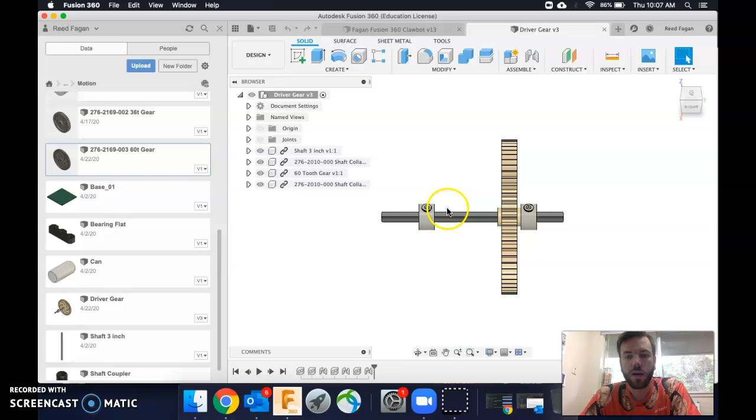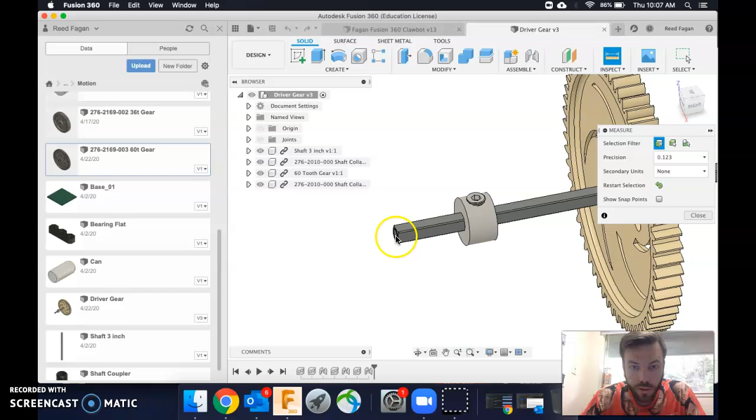I already measured this out so that when I put it in the assembly, it matches up and meshes with the other gear instead of being offset to one side or the other, right? So let me just tell you what those measurements are, and then you'll be able to do this yourself. From here, let's go from that circle to here. I think it's going to be 0.875. And that's exactly right, 0.875, okay?

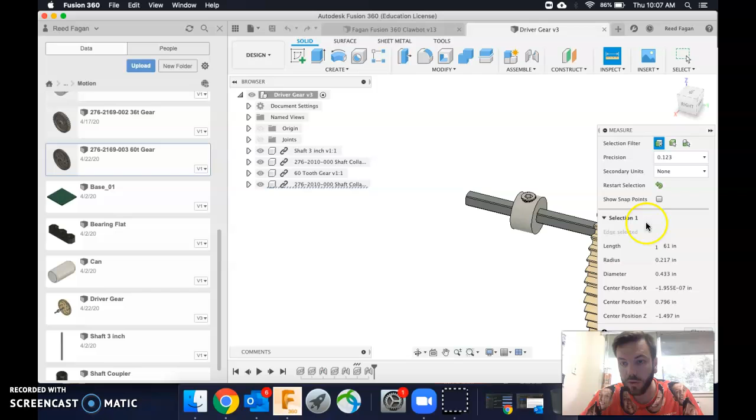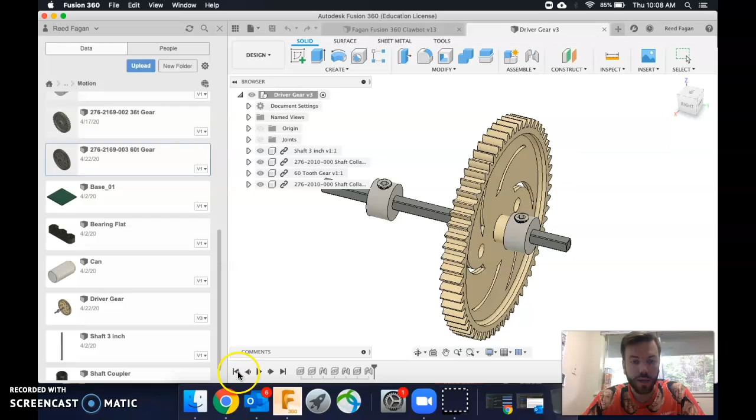And if you want to see what the workflow is, let's check that out. So I brought in my pieces. I fixed the one with the rigid joint, made sure it was 0.875 from that end there. Brought in the gear, brought in the next shaft.

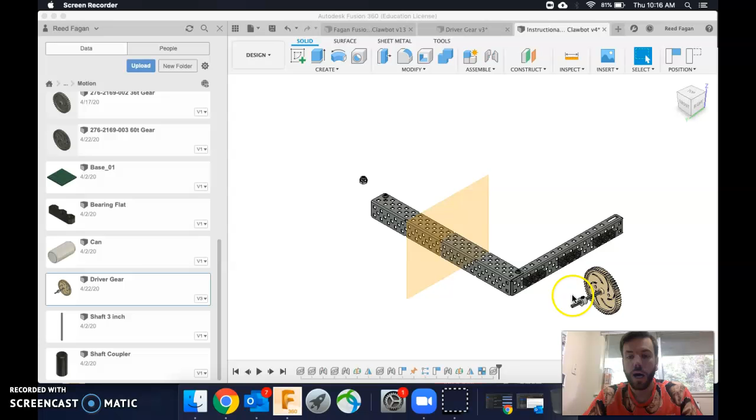One more thing to show you before I let you go, just in case you're having trouble with this or need a refresher, to put these things in when you constrain them into your full design. Basically, it'll look like this. So you hit J, go ahead and capture position so things don't move from the position they're in. And you're gonna say you want a motion, a Revolute joint, okay?

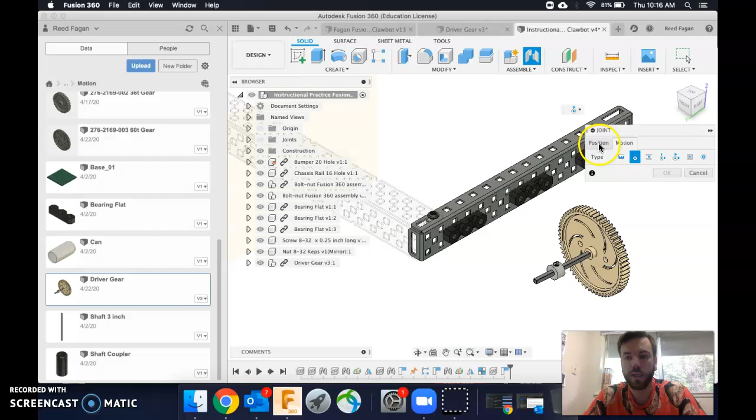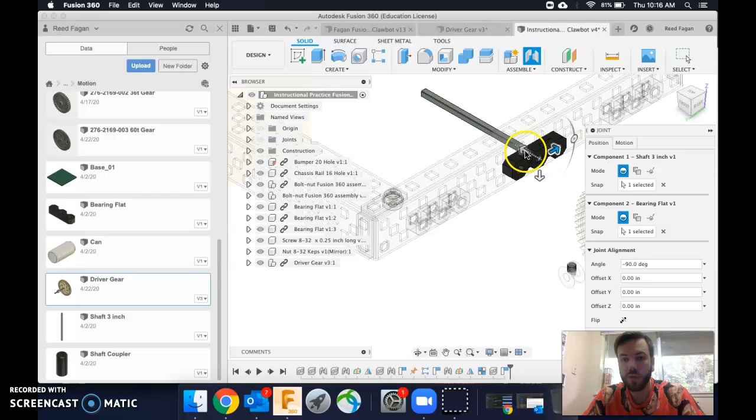And you want to take basically the end of, so let's hit select, your thing here, there we go, with that little center mark in the middle, and then you pick the other one, select, and let's say we want it there, and then just flip as needed, and you can also drag out and all that stuff as needed before you click OK. All right, so yeah, obviously this would need some adjustment, but we could go in and do that. There you go.